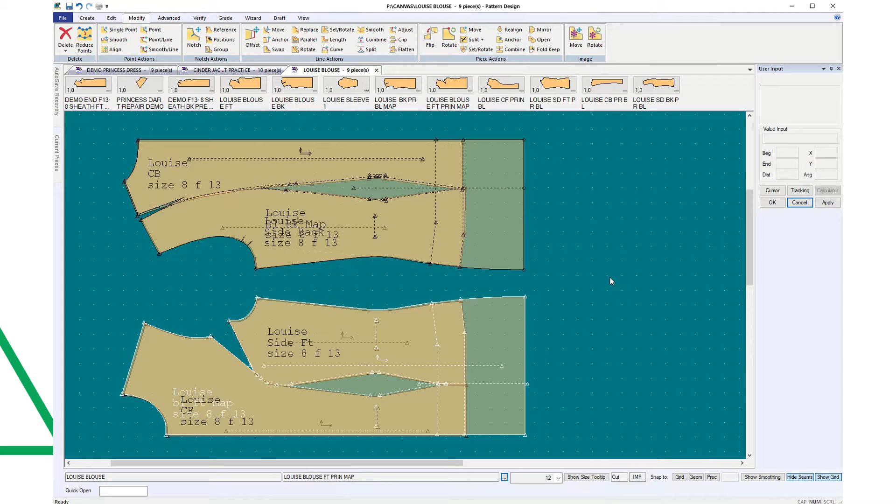Once you've created your pieces and separated your pieces, then it's time to clean them up and smooth them out.

It's always best to look at them the way they're going to be sewn together. So you're not going to put the center front and back on top of each other. You're going to put the center back next to the side back, next to the side seam pair, and then the front and then the center front, or vice versa, however they are on your screen, but the way they sew together, because you want to match those lines.

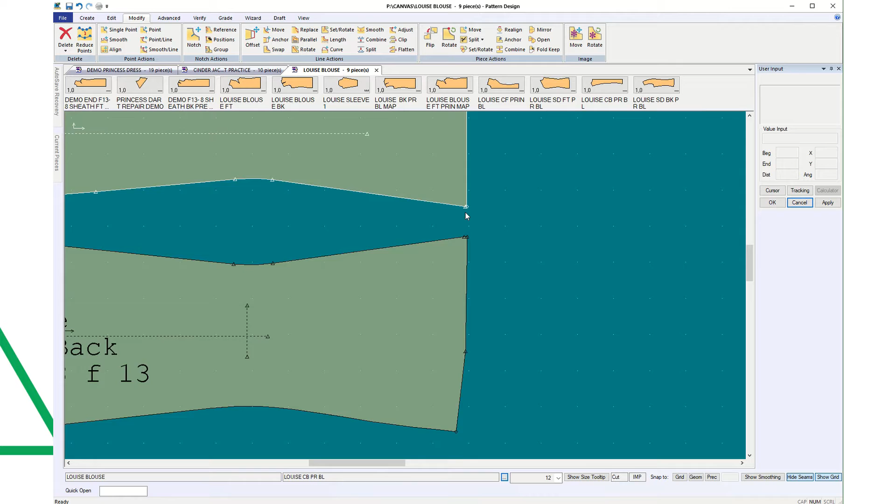You want to combine lines and match notches and make sure that everything measures accurately. So I'm going to start by combining lines. We have a little discrepancy down here where it turns a corner, but I'm going to add extra flare right there. But I need to keep in mind that that extra line split is there. So I'm going to start by modifying my lines and combining them in a clockwise order. This one might not bite you if you don't do it clockwise,

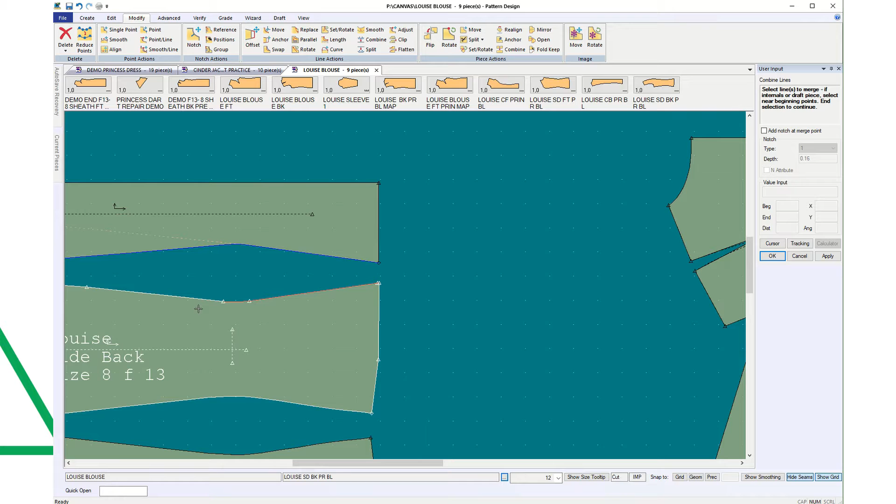But it could. So I've combined that line into one, and I want to get that little itty bitty one. And you could see I kept catching that white one, so I need to touch down in the water and slide around to get the right line. If I had my pieces separated further apart, I wouldn't have that problem. Okay, so that's combined.

And I'm going to combine any line. I don't want to combine my corners, but I want to combine everything else. And it looks like I only have corners now, and that's what I want.

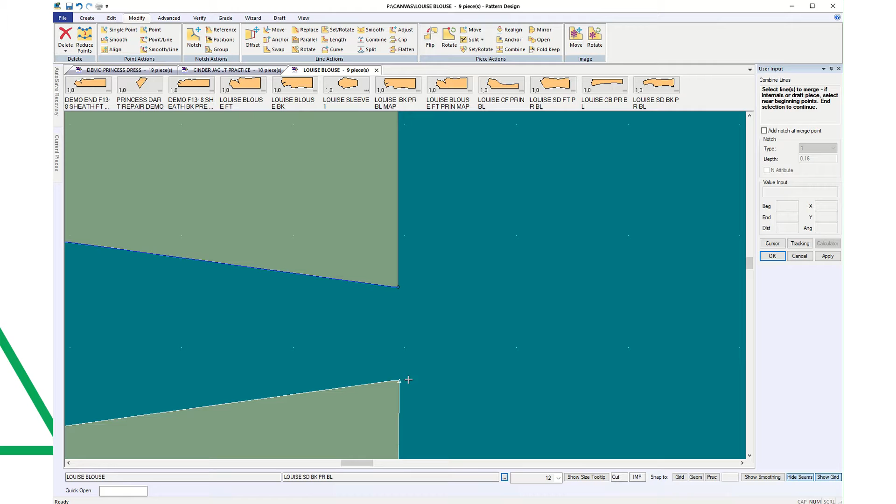I've seen a few of them where people end up with a diamond shape. Oh, here's one. If you've got, what we're looking at right here is the end point of a line. It's an upward triangle, and so this line and this line are separate. But right here, we have that same thing. It's an upward triangle, but I also have a grade point. And when the grade point is attached to the end point of a line, it's the graded end point of a line, and you have an upward triangle and a downward triangle at the same time, and that just means there's a grade rule right there.

If you're not grading yet, don't worry about it. It's okay to have downward triangles while you're working on the pattern. You just need to fix them when you grade. So combine them and then don't worry about it.

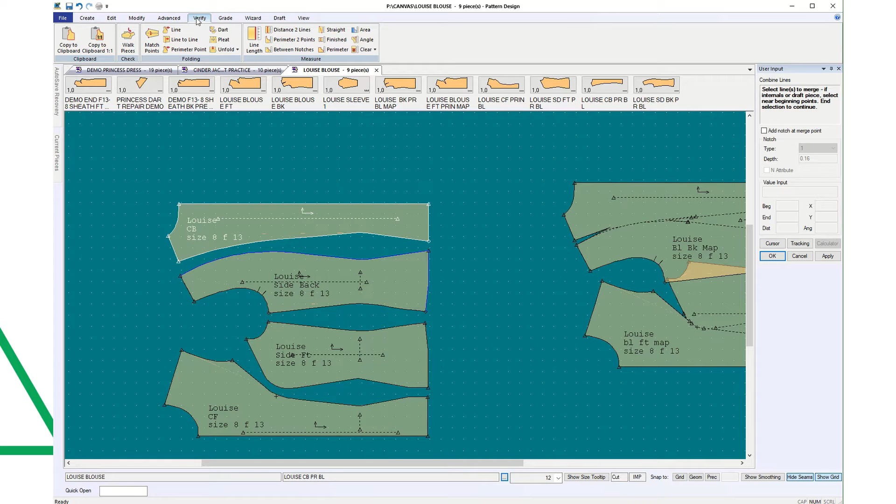Okay, so I'm going to start by comparing my measurements. So I need to go to verify line length. I want to make sure those two are the same, and those two lines. And while I'm at it, I could compare my front and back shoulder totals too.

And when I get to my sleeve, I want to compare my armhole. But right now, we have 18.55 and 18.70. Well, that's less than 1/4 of an inch difference, as long as your center front line is shorter than your side body line and it's within 3/8 of an inch. You should be able to ease that in okay.

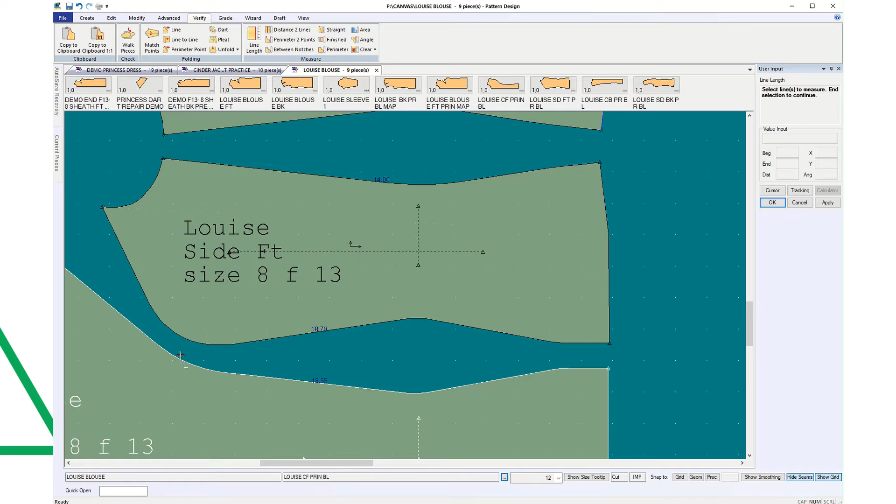So after I've got my line smoothed, I will probably just walk this along and add a notch here, and then walk it up from the bottom and add a notch here, so that I get all of this extra ease over the bust area. If it was more than 3/8 of an inch, I would look at trying to get rid of some of it.

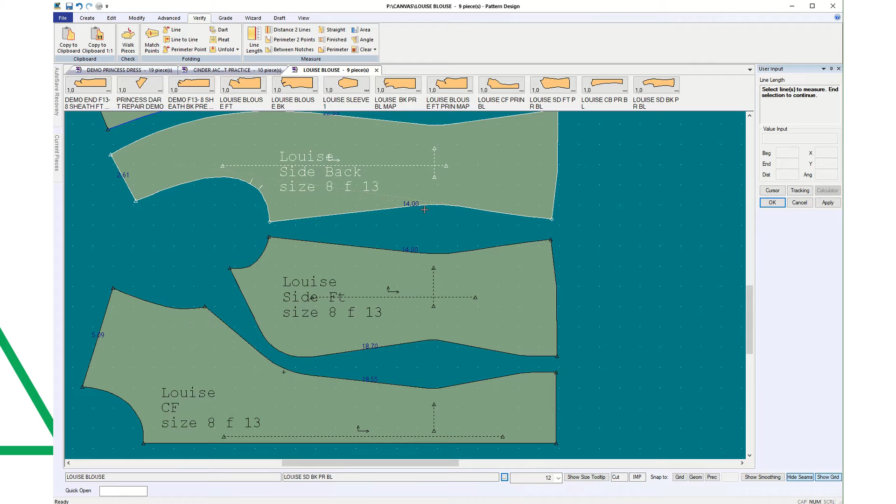But the way we did that, it should be quite accurate. These are an exact match. I'll want to flip them over and compare shape. And this one is 2 points off, which is almost not measurable, but this one is the larger one, so that's good.

So I want to look at, are my lines smooth? Do I have any bumps there? Do I want to make this less fitted? And if I want to make it less fitted,

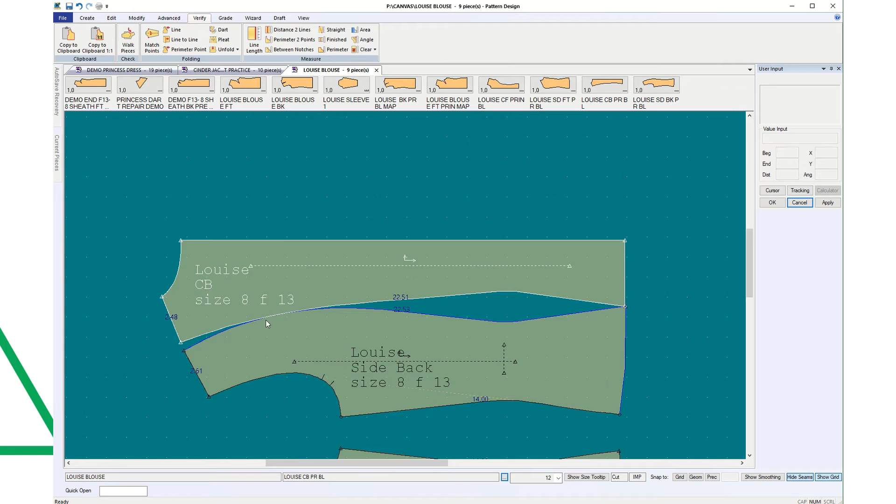I'm going to put those so that they're side by side. And this is a little annoying right here. That's where it shifts direction. Is that my amount off? Because if that is my amount off, maybe I want to pull this line up and shorten it.

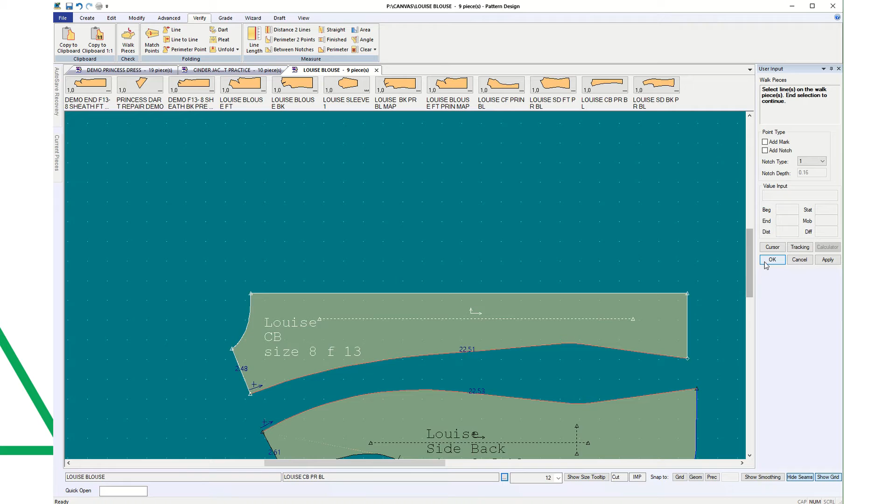So I'm kind of curious about that. I'm going to walk it from the top down. So that's verify walk. Select the line on the stationary piece. I want this one, and I want it going that way. Right click, say OK, and then I want that one, but I want to change direction, so I'm going to right click in the water and say change direction, and then OK. And as I walk this along, it's not quite right there.

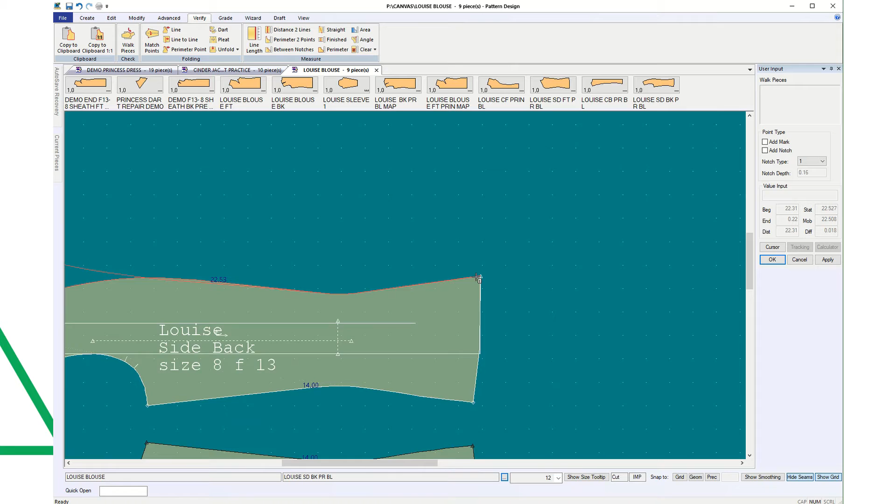But I think I'm going to just change it. Okay, so as I walk this along, I could measure down and put a notch. I could also click right here and stop and add a notch. So if I wanted to add a notch that way, I would come up to create standard notch, put in one of them, and then I want to specifically choose the other one, but the one I've got right now is the side back. So if I want to add a notch visually, I'm going to want to add it.

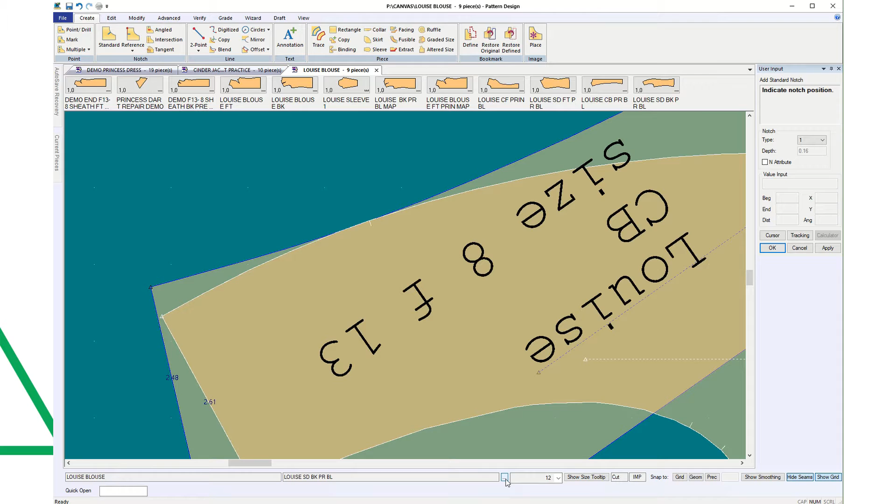I'm going to come down to the bottom and click on the little dots, and come up and choose the center back, and now I automatically have the other piece, and I'm going to highlight that line and come right to where that notch is and add another one. And I'm slightly off. I should have zoomed in more, so I'm going to try that again. And that's so close it's not letting me.

So I'm going to delete that. Modify, delete notch. Oh, looks like I've got a whole bunch of notches there. Something I try to teach you not to do, and there I did it. Okay.

If I had left those 3 notches there on top of each other and this got sent to the Gerber cutter that way, it would have had an error and cut a hole right there. So watch that and keep track of what you're doing. That could cost a company a lot of money.

So it's probably going to be easier for me to add that by measurement, but I'm zoomed in all the way, and I'm going to try it one more time, and I'm going to walk along here, but there's an intermediate point really close, and it's just going to that intermediate point.

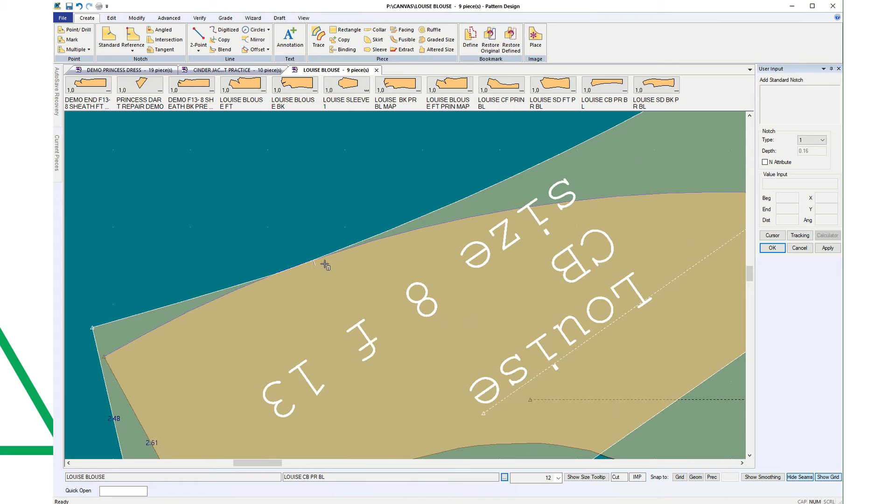So what I'm going to do instead is undo the notch, and I'm going to modify the line and split it. Oh, and see it's stuck on that piece. So last time I came down to the bottom and clicked on the dots. This time I can come up here to current pieces. If you have that set up that way, you can go to current pieces and clear all, so it's not hanging on to that one piece.

So now I can come in and split the line where the notch is, and that tells me that that notch is at 2.98.

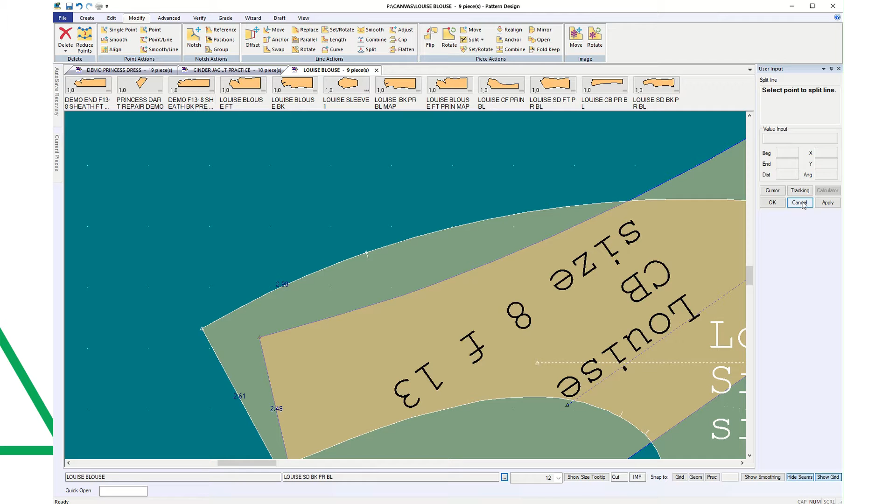So I'm going to cancel, and on this one I'm going to come up to create add notch, switch to value, and indicate my notch position, and I want it on this line, but I'm going to right click and say distance from point, and select the point to measure the distance from. That piece is flipped upside down, so I have a 50% chance of it going the wrong way.

I'm going to guess, I could be wrong, but I'm going to say negative 2.98. Well, it went positive, so I have a notch right here.

So I'm going to do that again. Select, and I ignored that the thing was there. I touched down and slid. And I'm going to put in 2.98 positive this time. And there it is where it belongs.

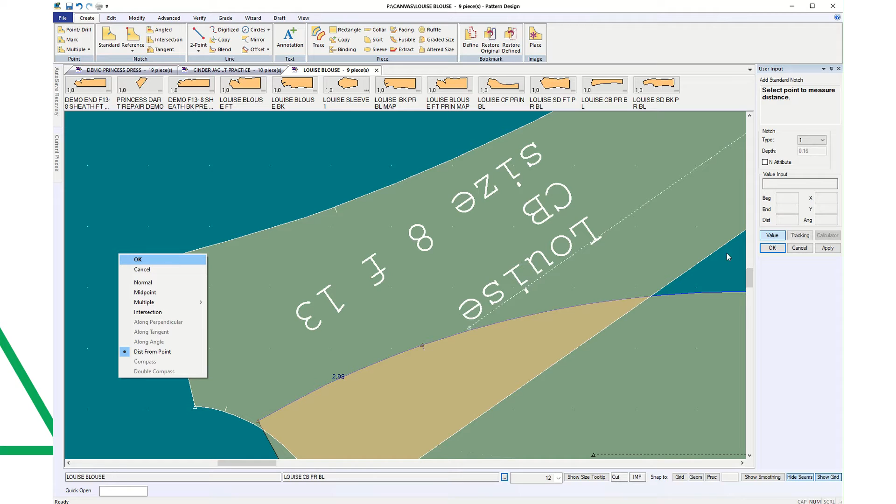Say OK. And then I'm just going to go up and delete the notch that I put in on the wrong place. And if I modify split on this notch, then I have exactly 3. Why do I have 3 if I said 2.98?

Oh, because I split the line in the wrong place. So you have to be really careful. So there's my split point. And if I don't want that intermediate point right there in the same place,

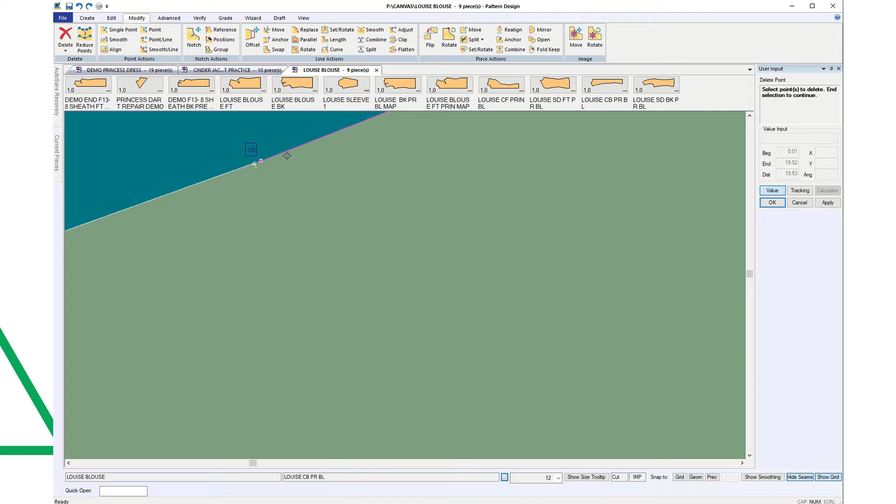I'm going to modify single point. No, I'm going to delete single point, and I'm going to delete that intermediate point, because sometimes having points that close together can be a bad thing, and it didn't affect the shape of the line.

Okay, so we have both notches at 2.98, and that's what we want. So adding them as a measurement, or at least adding the second one as a measurement, can be more accurate.

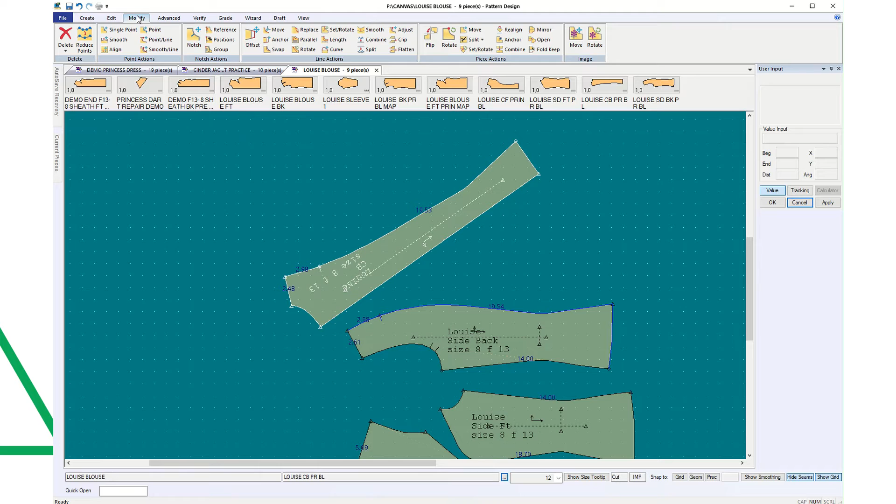Now I've got this piece kind of messed up. Some of you are going to want to put it back the way it belongs. To do that, you're going to go up to Modify, Piece Action, and Realign. You're not going to realign the grain, you're going to realign the piece, and then touch it, and it goes back to the way it was.

And that lines up and matches. So because of the way these two shapes were separated, this one's coming down a little bit longer, so I don't feel bad. Oh, they're only 1 point off, but I'm going to walk them the rest of the way down.

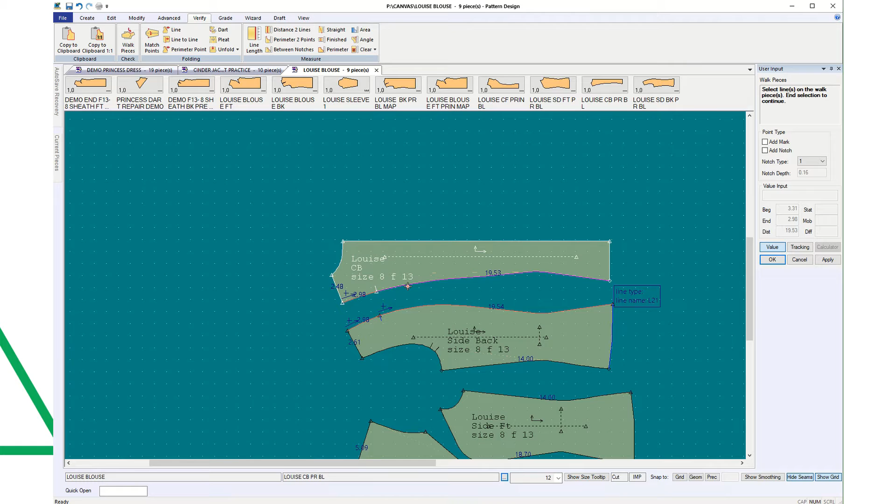So verify, walk pieces - the lines on the stationary piece are both going the right way. The lines on the other piece are going the wrong way, so I have to change direction first, then choose the next one and say OK. I have to switch to cursor so that it moves the way I want it to.

So my notches are lining up exactly, and I'm using the little roller ball on the mouse to zoom. As I get down toward this end, I'm going to move my mouse out here in the water and then zoom in so I get the view I want. So that's looking really nice, and my curves are coming together right there.

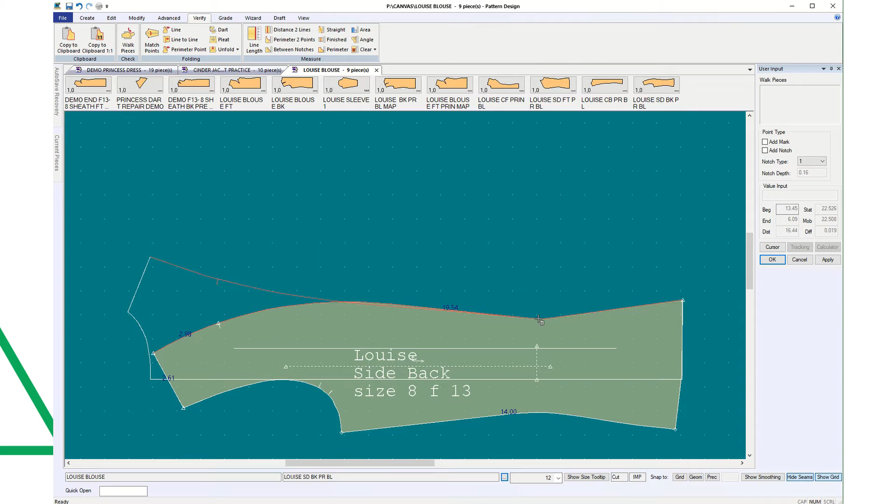I like the way that's coming together, and we moved this line a little bit, so that's going to be all right, but I'm going to set it down right there. And I could have been a little bit more accurate if I had zoomed in.

I'm going to show you some things that might be a bad habit that you have to be careful about doing. But in looking at the way those lines come together, they're really close.

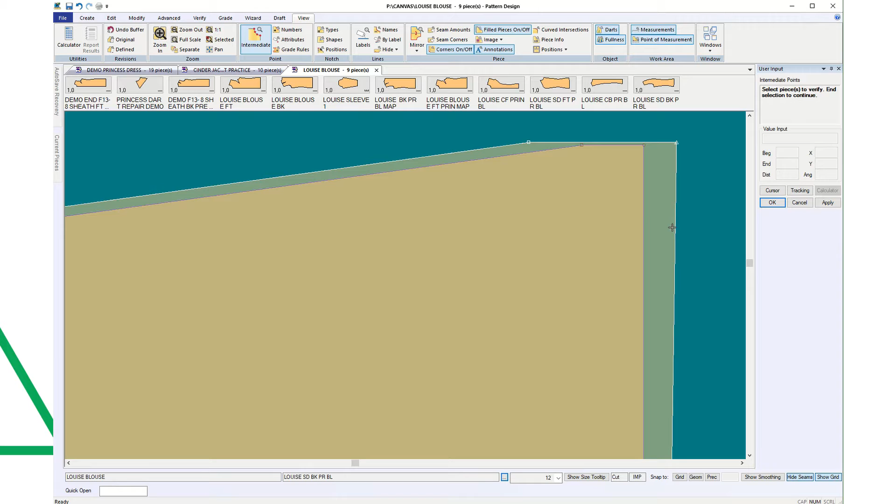And I want to see where my intermediate points are. So view, intermediate points - I'm going to choose both pieces and say OK. And I don't have any intermediate points. You can see where the intermediate points are everywhere else, but I don't have any intermediate points down here that are going to affect my decisions.

So I'm going to take this longer line and modify single point. I'm going to select the point to move - that would be this one - and I'm just going to line it up so it's on top of that one.

Now, maybe they're the same length. I don't know. Let's see. What did I do?

Now, you don't have to do all of these things. You're learning how to do things. I'm being overly nitpicky, perhaps, but they're within 1 point, and that's less than a 32nd of an inch, so I'm happy with that.

And I've got this line that's straight up to here, and I've got this little messy area right here.

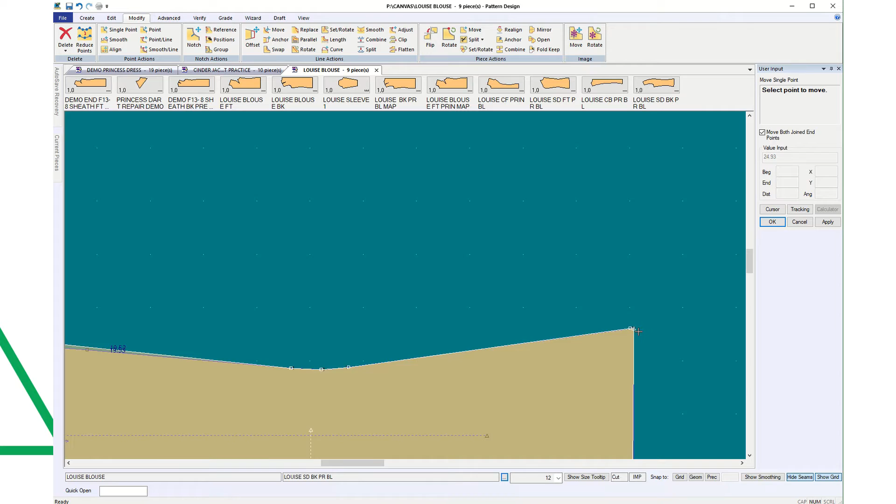So I'm going to split one of the lines where it's straight before it starts to curve. Modify line, split. Right there.

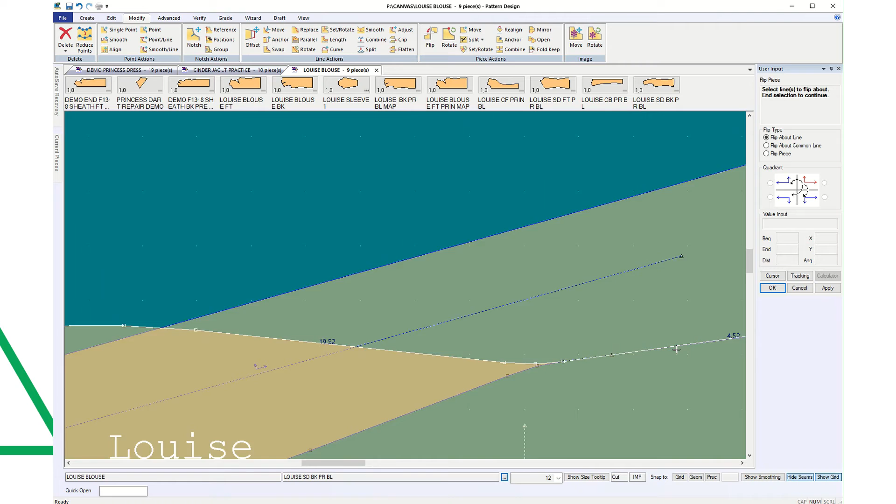And that line that's split, now I can flip around it because it's straight. So modify, flip piece - I'm in piece, flipping the piece about a line, and I'm choosing this one, and I'm going to say OK. So now I have my two pieces side by side right there.

And I would like them on top of each other a little better than that. But I can see that I've got 4.52 right here.

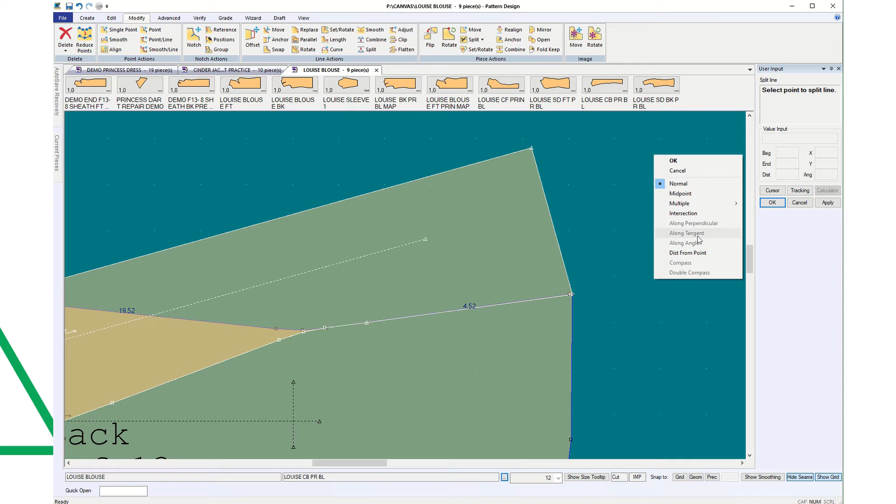So I can do that same thing on the other side. I'm going to modify, split line, right click and say distance from point, and instead of this piece I'm going to choose this one. Well, where am I? Oh, there we go.

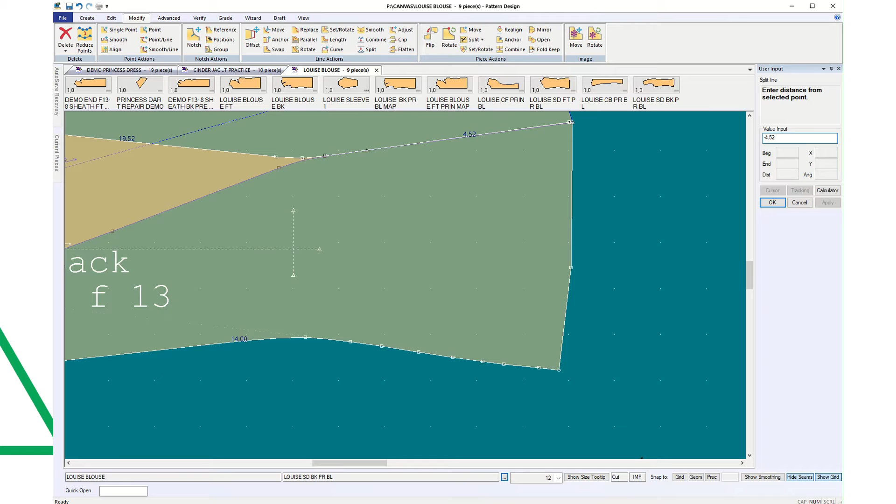So I'm going to come down to the end of that and say negative 4.52 and OK. So they're both split in the same place, and I'm going to separate them for a minute.

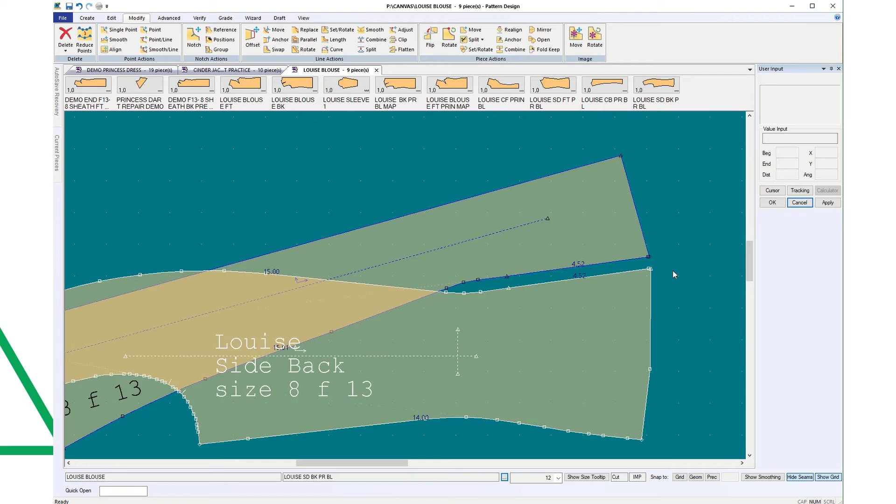This is a little mini version of something you might want to do with a longer piece. Because we're looking at the hem area, I could add flare there, and if I had made my pieces longer, then that little chunk that's missing would be even bigger.

So I'm just going to straighten out that line. I want to keep this point.

And if I zoom in right here, and create a 2-point line from up here where I can see it, to where that line now is disappearing into that point. At the point that it disappears, set it down. And I'm zoomed all the way in.

So I'm going to modify the line and split it right there, and then I'll put it back together. Modify line split, select point split, and when it's split right there, I'm going to swap the line.

For the piece I'm working on, this is not really very important, but you will be working on pieces that have a space like that, and when you've got hip flare, it's best just to let it flare. So I'm going to swap my solid line for - oh, I didn't split it. You can see the whole line lit up.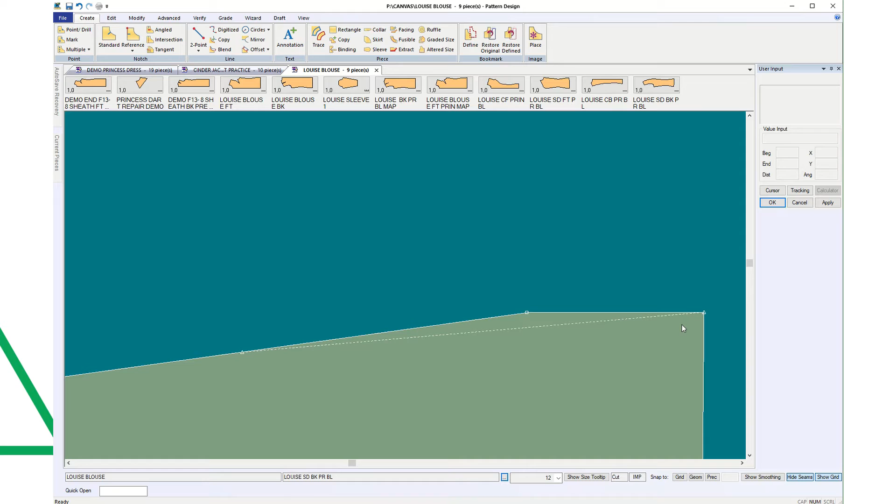Okay, well, it's just jumping to that point because it's such a small space, but we're pretending it's a bigger space. So that's where it went. It's going to keep doing that. If I had more space, I could have extended it out, but I'm going to show you how to solve that problem.

So instead of deleting it and doing it over and making it longer, I'm going to keep it, but I'm going to modify the line and rotate the line, just plain rotate. Select the line to rotate, this one. The point to rotate around is the very end, and then I have it set to select a reference location. I could try bump to line.

If I choose a reference location, I can pull it out to exactly where I want it, where it disappears into the line, and move it. And I am happy with that, and I can swap it, and maybe I want to make it a little bit longer, so I'm going to go up to adjust. And I know a lot of this is boring, but it's problem solving.

If I had wanted to try the other way, that's what I would do, and I would split the line and swap it again. But if we went back to modify line rotate and chose bump to line, I'm choosing this line, say OK, point to rotate around, point to guide the movement, select line to bump to. Well, that didn't help at all. So I'm going to go back to the other one. There are some times that will help you, but not this time.

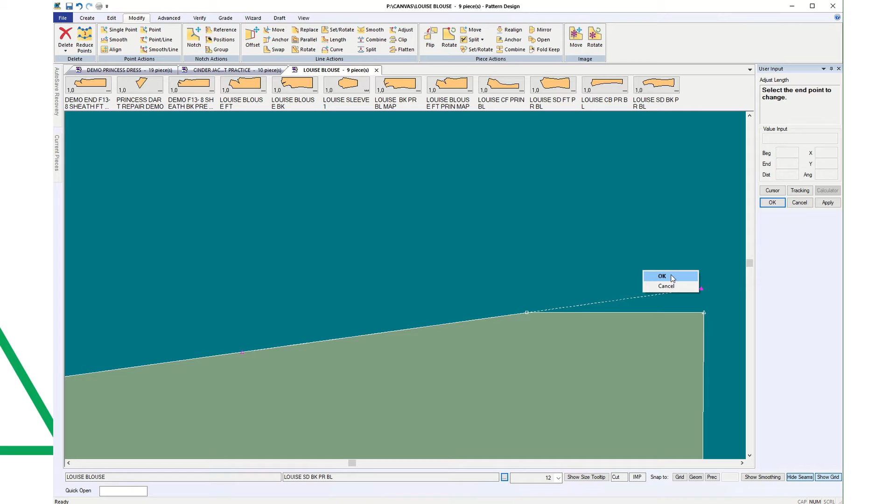So I'm going to go back and rotate the line. Modify line, rotate. Choose the end, deselect bump, and rotate. When it disappears, then it's in the right place. And I'm going to adjust the length again and pull it out.

Modify split, right, no, I don't want to split that line. I want to split on this line at the same place. I don't want to make the same mistake I did last time. And then I'm still in modify, so I'm going to switch to swap and choose the dotted line and then solid line and then delete the line. And then combine the line. Okay.

So they're still both at 4.52, and now I can put them back together where they're split. So I'm going to do modify piece set rotate, select the match point on the target piece, that end of the line, that end of the line, that line, and now they're stuck together, and I'm going to say cancel so that they end up right where they are. Well, now I've got this.

And they were the same length, but because I split the pieces in the exact same place before I changed the length, I can leave it here and blend this. So to blend this edge, it's not a 90-degree angle right now. The more important factor is the smooth curve. So I'm going to create a 2-point curve that starts here and comes down to here, and then I'm just going to blend across.

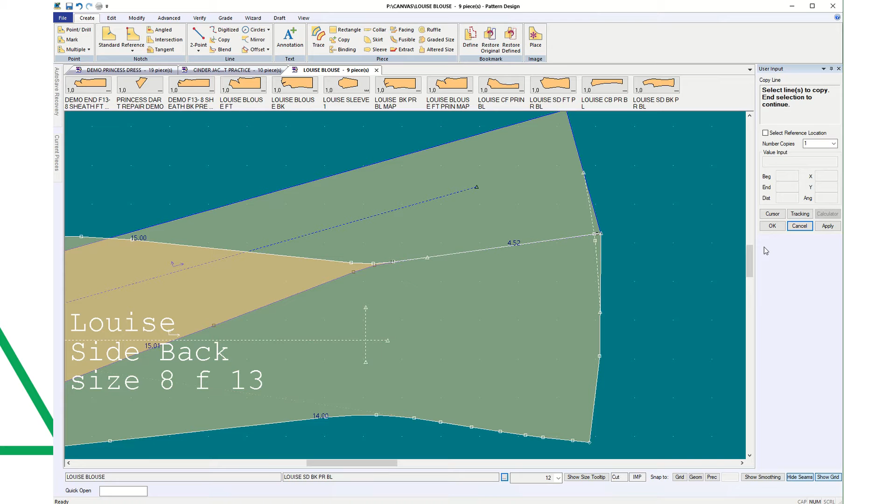So I'm going to create line copy now and select the line to copy, this one, say OK. I want it to go on this piece, so I'm going to say OK to that. There's my line. I'm going to come back and say cancel, so now I have one on both pieces. And I'm going to say OK to get out of that. And I'm going to move them apart.

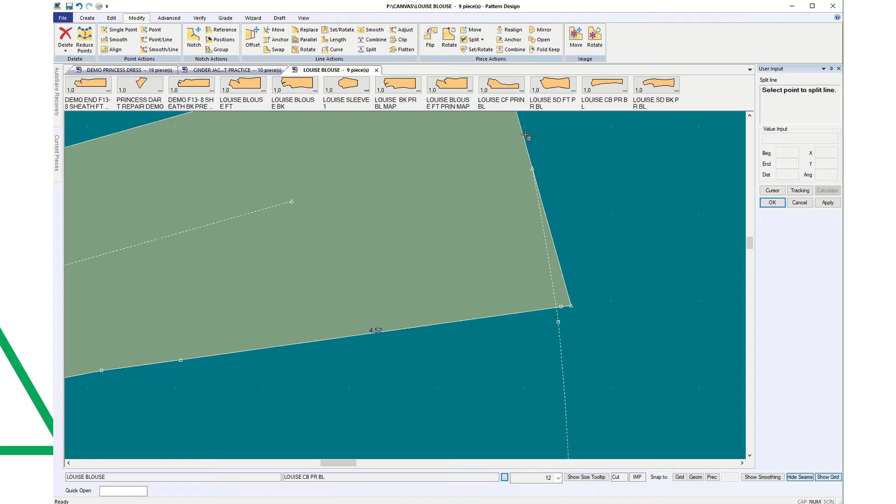And I want to swap this for this, so I need to split right here. If you forget to split, you get a mess. Modify line, split right there in the same place. And I'm going to do them both at the same time. So while I'm in split...

Now I'm going to go back up to swap. I want this line instead of this one, and I want this line instead of this one. And now I'm going to delete those. Delete line.

Some of you, I find at this point, can't tell which line you need because your lines are not dotted. If you're finding that the lines on your screen are not dotted, like my lines, you can't tell internal lines from solid lines, lines that are permanent from lines that are temporary. If you don't have dotted lines, come up to Edit, Customize...

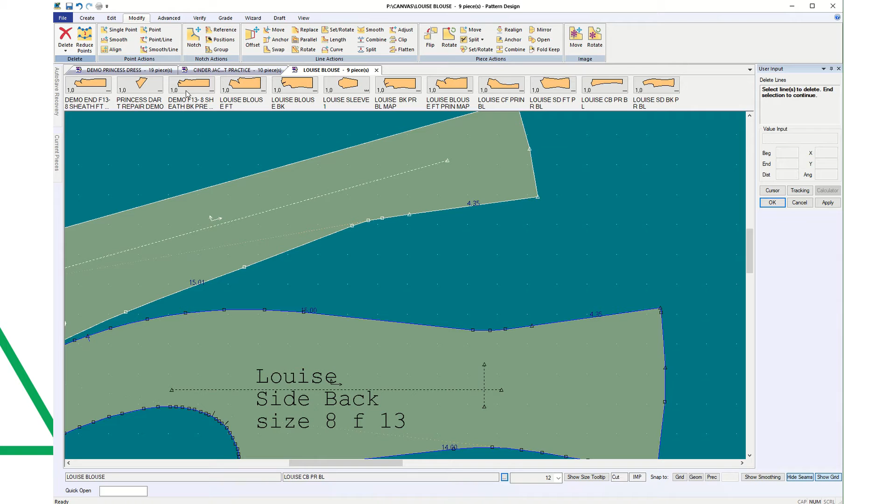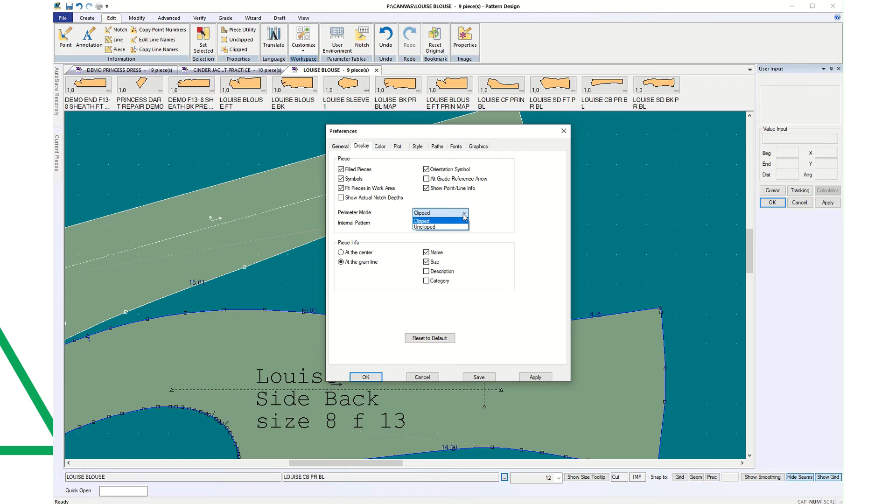Screen Layout. Nope, sorry about that. Customize, Display, and make sure you say clipped and dashed. You don't want solid lines here, you always want dashed. Apply, save, and OK.

If you do apply and save, it's more likely to be this way when you come back next time. Okay, so those match now. And if I want to, at this point I can walk it up from the other direction, and I have 15.01 and 15, so I'm happy with that.

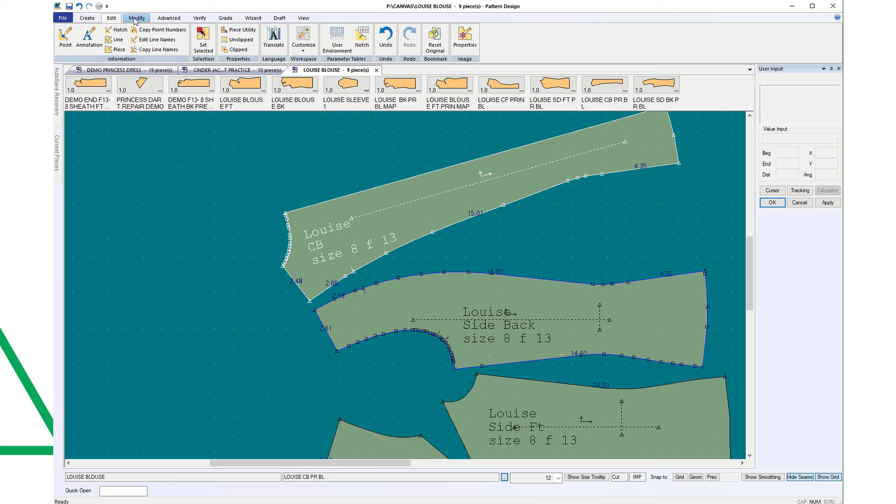I'm going to combine these two lines back, modify line, combine. I want to combine those two, and these two, those two.

So your lines should only be split at the corners now. And now when I walk pieces, verify walk pieces, I'm going to start from the bottom and put in a notch. This is my stationary piece. I want it to go the other way though - change direction. And it looks like I need to combine those lines, but I'll do that next.

Oh, stationary piece, I didn't say okay. And then the walk piece. And it's going the way I want it to, so okay.

So at this point, I could come in and put a notch here somewhere. You could put a notch anywhere between here, and that's up to you. Probably what I would do is decide where I want it and just split it, because it'll be faster.

In fact, I'm just going to put it where that point was. So I'm going to create a notch where I already had a point where the line was split. And if I split the point there just to see - modify line, split - see, that's what I should have done before. So 4.35. And if I split this one back again, that's still 4.35. So I'm going to add a notch there. And I could have thought of that a few minutes ago and saved that much time.

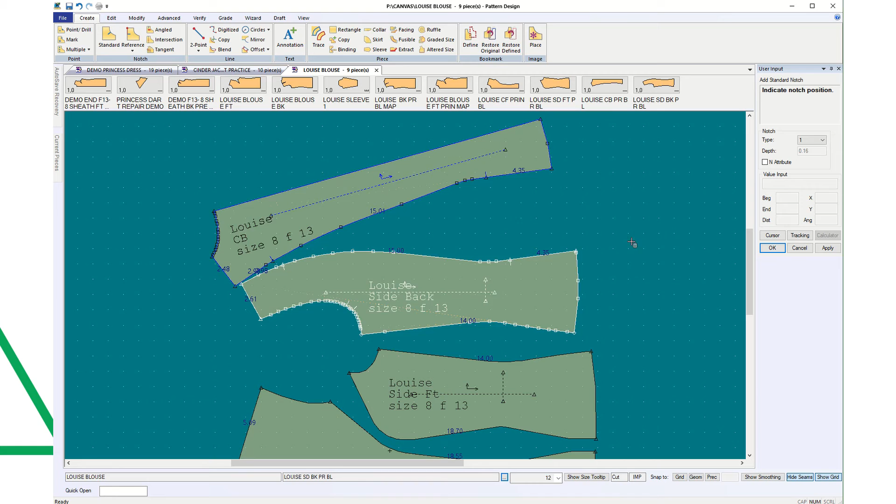Modify, combine. 1, 2, 3 lines. Okay. Modify, combine. 1, 2, 3. And I'm going clockwise in order.

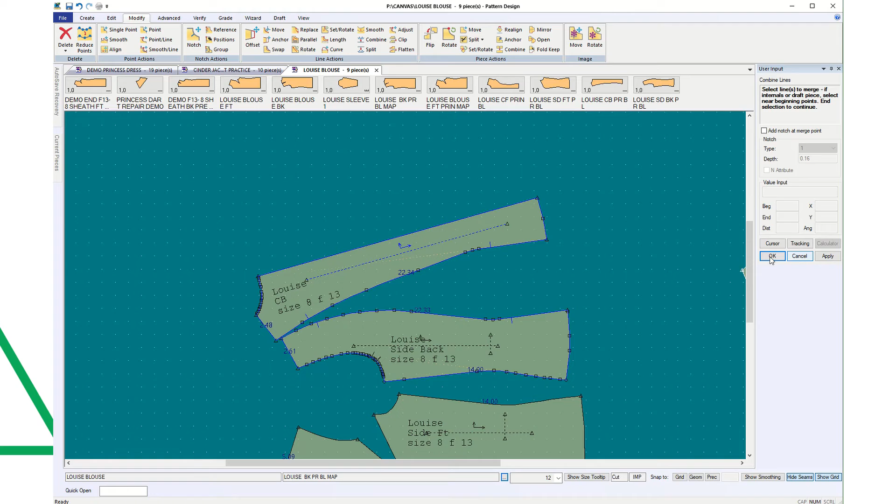Okay, so some of those lines you could smooth out more. I want this to go back, so I'm realigning the piece. So I've got those two matching. And I've fixed the hem so it's nice and smooth.

These two look like they might need to be lined up. And these two, you'll go through the same process, but you'll be adding more flare right there than we did on the back. Okay.

If I do set rotate on the back piece with the side piece - well, I didn't say cancel, so that's messy.

And I've got them together. I can see this is a nice curve shape, which I would need to check. And I want to flip around this line, but if I flip around the line now, well, I'll show you because you'll remember - if I flip around this line, it goes crooked.

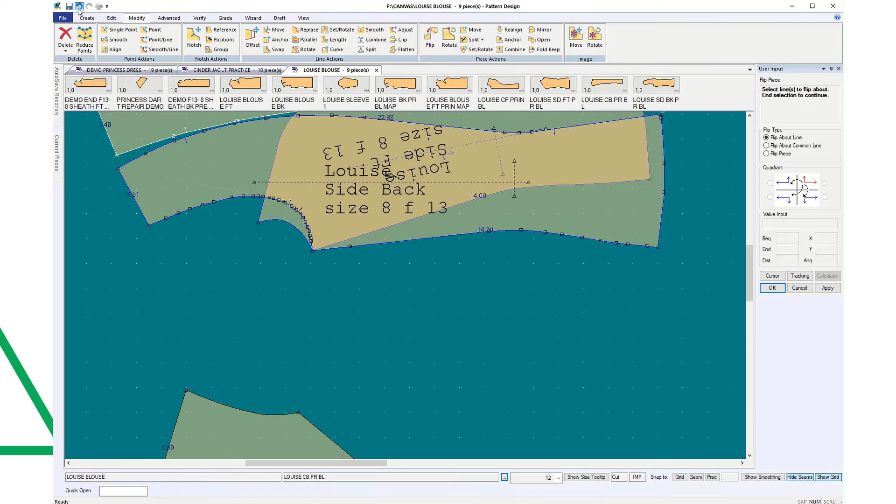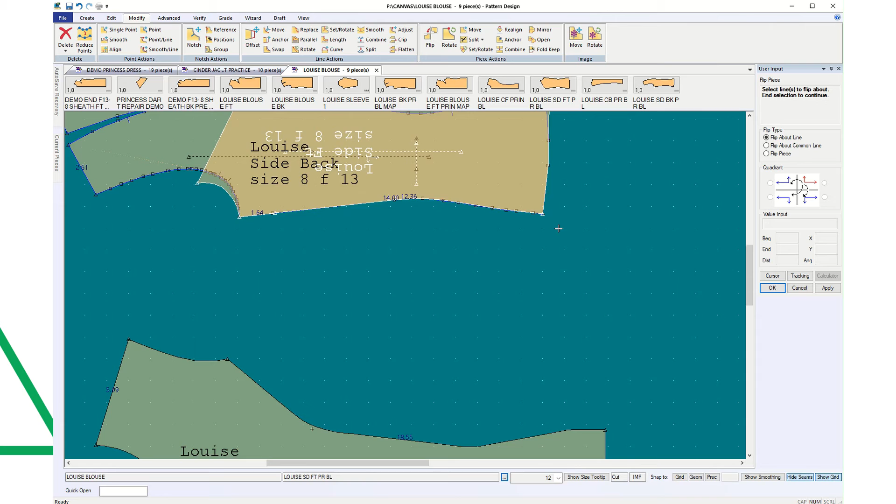So if I undo that and I modify the line and split it where the line is straight, and I flip around just that straight line, then I can tell that these pieces align exactly. And they might be a 1/16 of an inch off, and we could rotate them around and make sure they're okay, but I'm going to leave that one be. So I'm going to undo both of those and put this back over here. So I have this matches this and this matches this.

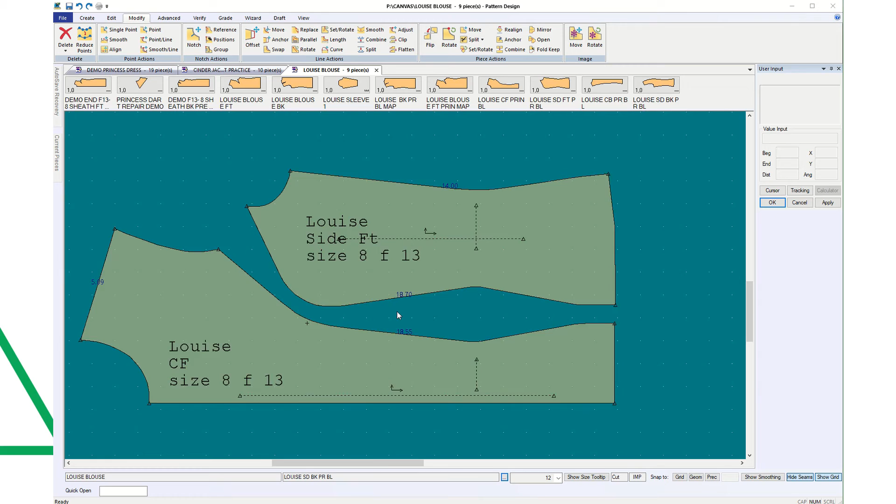And now we want to make sure these two pieces match. Well, this one - typically they're not going to end up the same because of the size of those two darts. As long as your center front line is the shorter line, because you don't want puckering on your center front line. It's okay if you have a little bit of ease getting your side front into your center front, but not the reverse. So because this line is the shorter of the two, it's okay.

So 70 minus 55 is 15. So that's less than 1/4 of an inch. So that's going to be an okay amount to have there for ease. I am looking at these two lines, and if I want to make the curve slightly different, you don't want any bumps.

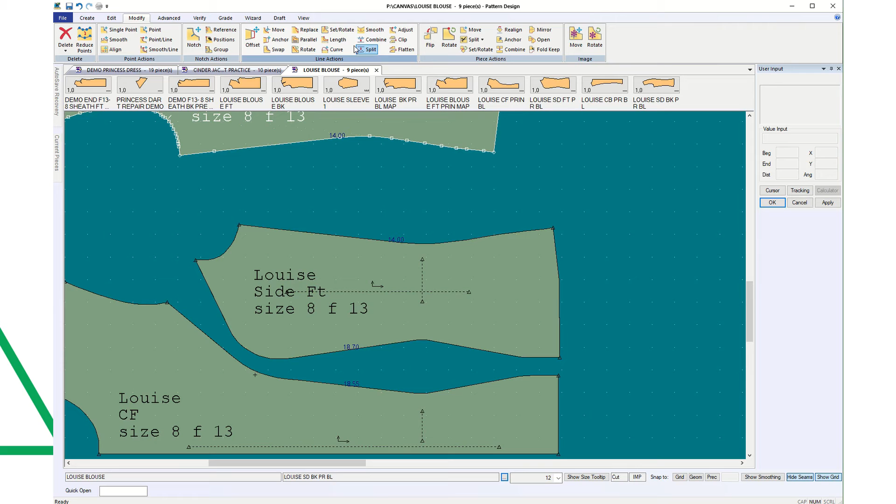Right here, there's a point that might be out of place, so I'm going to put my intermediate points on there. The view, intermediate, touch, touch. Okay. So I have where the curves are, you can see my intermediate points. It feels like it's that one. And in TUKAcad, I would probably go in and pick that point up and move it.

In Gerber, I can blend that point, but I'm zoomed all the way into it now. And maybe I'll try moving that one single point a little bit. Or I could delete it. What would happen if I deleted it? Modify, delete point. Well, that's worse. So I'm not going to do that.

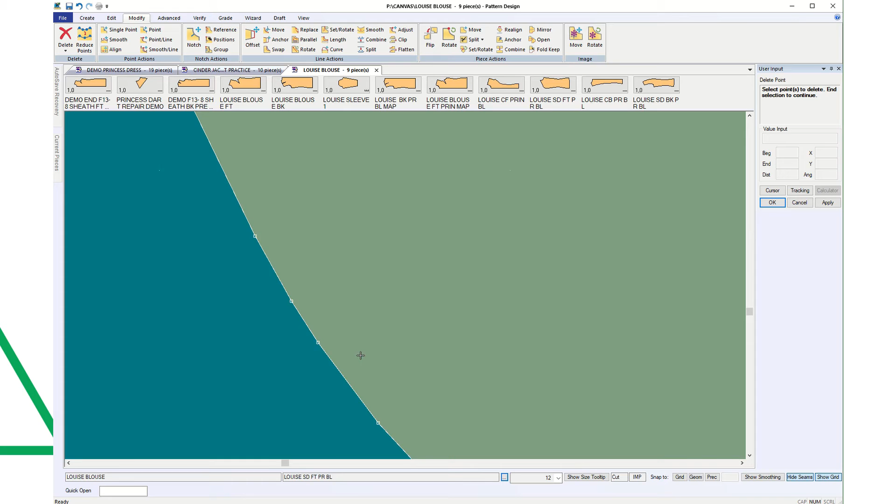But I can create a point. And I want to put a point here and a point here because I want to hold the line right there. And now if I come in and modify delete point and I delete that one, I just smoothed out that curve without extra drama. So you can go back and watch that again. But I added a point on each end where I liked the curve, and then I deleted the pointy one.

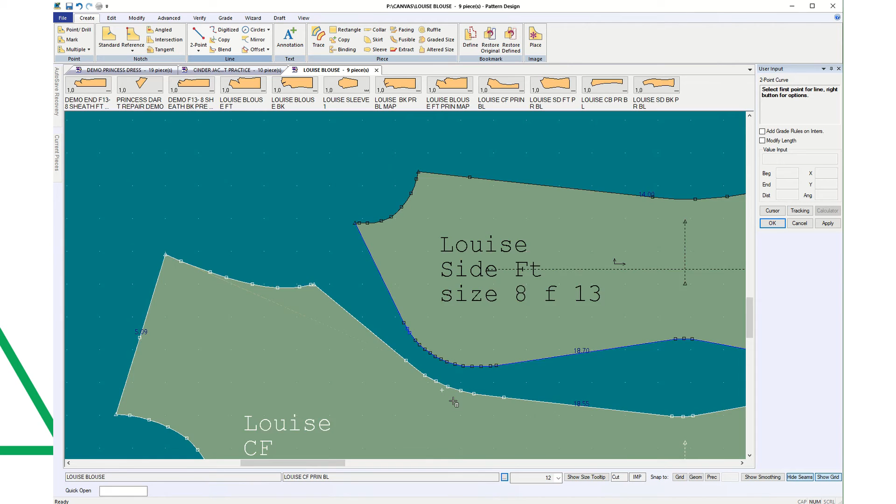And you've seen multiple times. If I want to change it, create 2-point curve, I could come into maybe this area, and if I wanted to flatten that curve out, I could do that too. And I am moving it a little bit to the side of the bust point. I'm curious, how far is that from the bust point? So I added a line just so I could measure the distance. Verify line length.

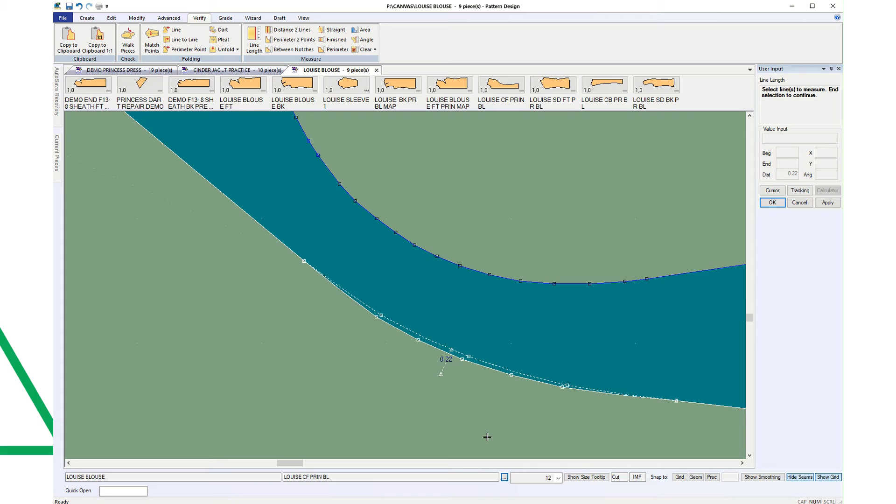That's less than 1/4 of an inch from the bust point. You can have that wrap around to the side at least 1/2 an inch before anybody notices. And depending on cup size, you could even go as much as 1 inch. So that's okay. You don't have to change that curve. I'm just showing you because if you want to, you can, but you don't need to do that. This is how to.

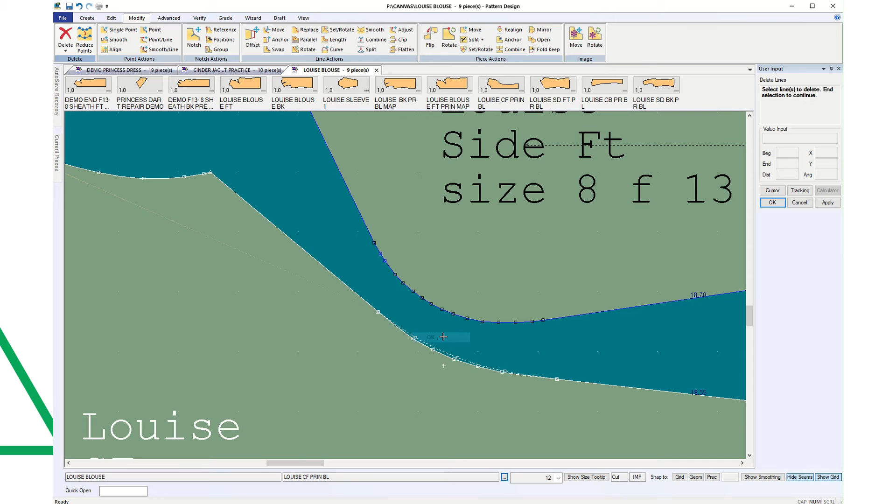So I'm going to delete that line, and I'm going to modify split. Come over, touch down, slide, highlight, release. Same thing again, and split, modify line, swap, dotted line for solid line, and I'm going to delete that line. And now I'm going to combine it again and see what my measurement is, because I probably changed it a little bit. Modify combine.

So I reduced it by a point. It's still less than 1/4 of an inch, so I'm happy with it. So I'm going to walk these pieces now. In fact, I'm going to split this line right here because I want all of this ease between here and here. Modify line split right here. 3.06. So I'm going to create a notch and I'm going to add it at 3.06.

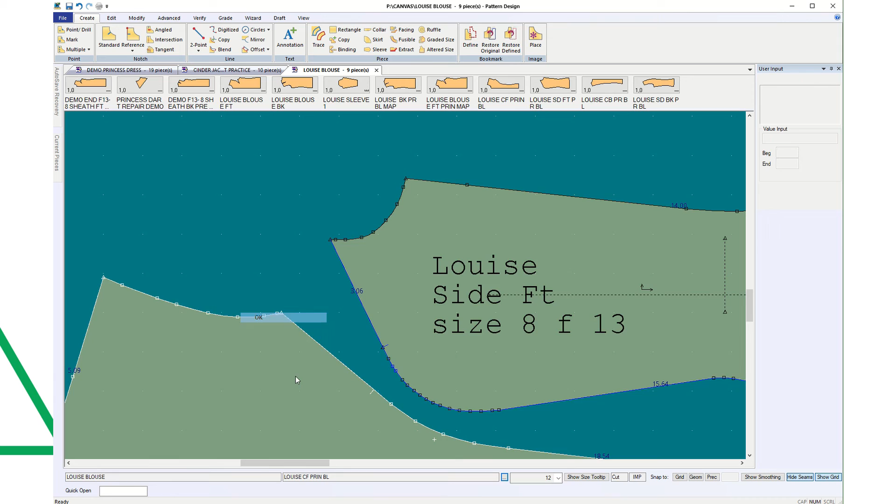And then I'm going to add another notch, but this time I'm going to switch to value and right click, distance from point, ignore that and come back. Oops, touch that point and put in 3.06 and say OK. So I'm going to combine that line back. Okay. So now

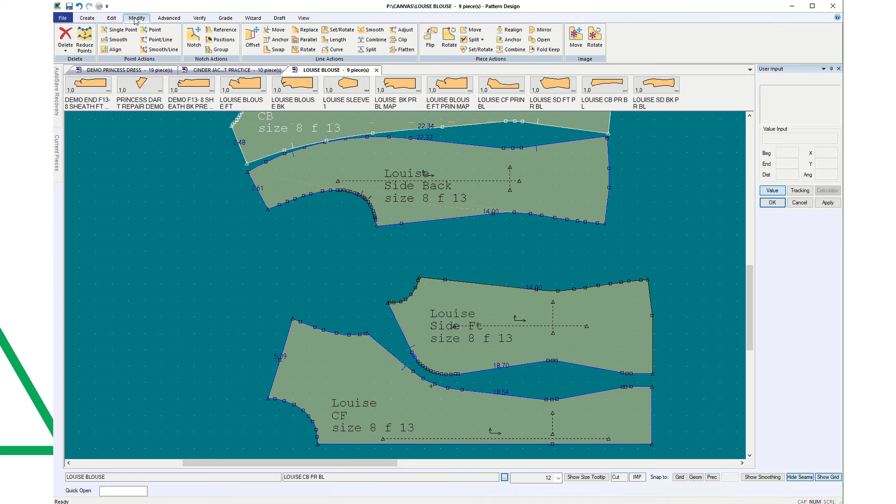Verify walk pieces, select the lines on the stationary piece. It's going from top to bottom. OK. Bottom to top, so change direction and then say OK. And now our notches are lining up, but it's not moving because I'm still in value, so I'm switching to cursor and now it's moving nicely. Well, I don't like that. And what if my difference here is because my length at the bottom has changed?

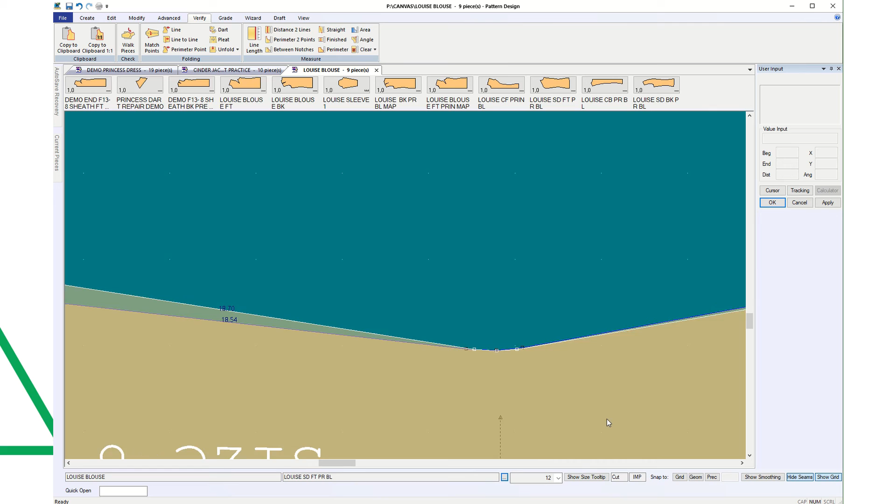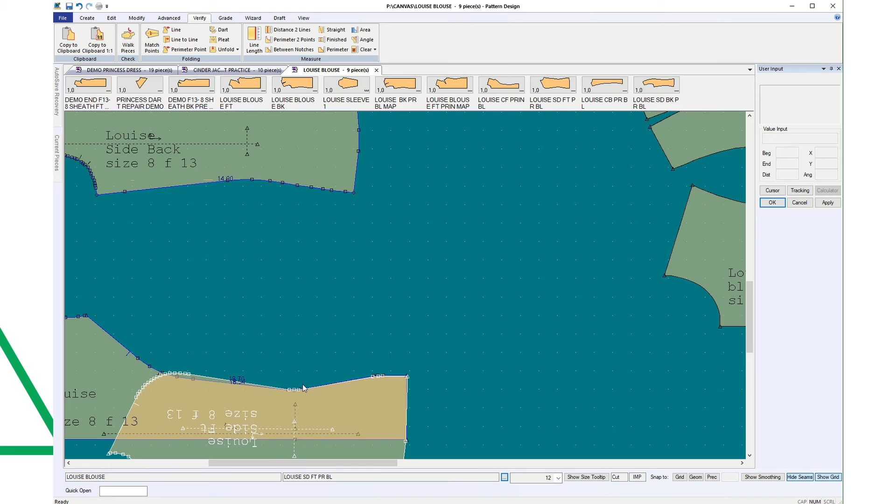What if I manually rotate that piece and look at it? Now I'm getting really nitpicky right now. This isn't something you would have to do. You could just measure up and put a notch right here and call it done. Modify, piece, rotate. Select the piece to rotate. Do I want it to go clockwise or counterclockwise? If I choose this one, no, I want to rotate the other one. So I want to be counterclockwise and I want to choose my side front.

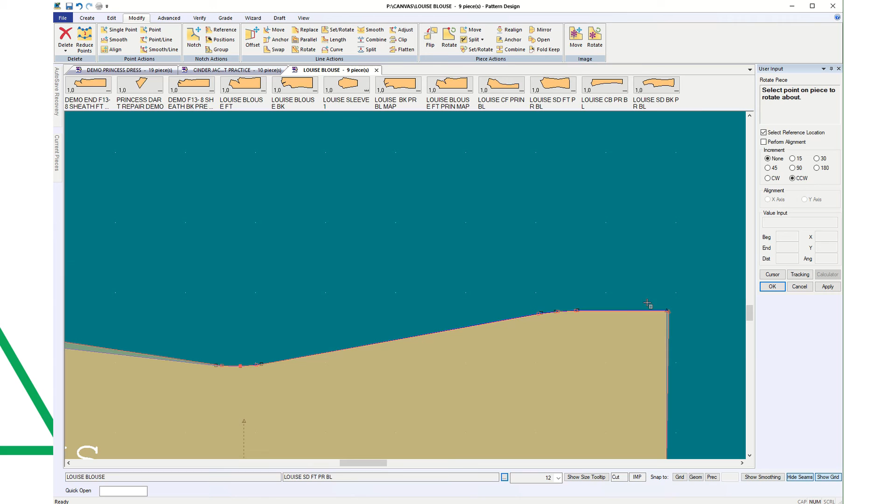Say OK. The point that I'm rotating around is this one. So I'm going to choose a reference point and pull it out here. And that's actually about the same shape right there. Before I split that piece, I might have been able to give myself a match point. So I'm going to do that one more time and zoom in a little tighter. And push that up to there. Well, we have an almost exact match right there. It's a little off.

But what if I move that point up? What's my line length right now? I'm trying to think the same way I think when I'm working with paper. So I found a place to line it up, and I'm going to shorten that a little bit. So can I move that line? I think I can.

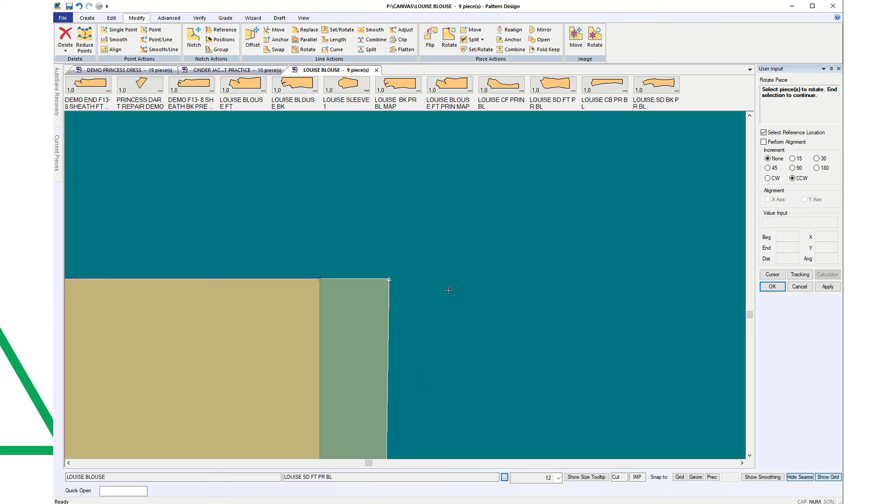So I'm going to take the longer one and I'm going to modify single point, and I'm going to move that one point and I'm going to drop it right there. Could have done a better job with that. When it disappears, it's in the right place. Okay, so I just made them closer in length than they were, and I'm happier with that.

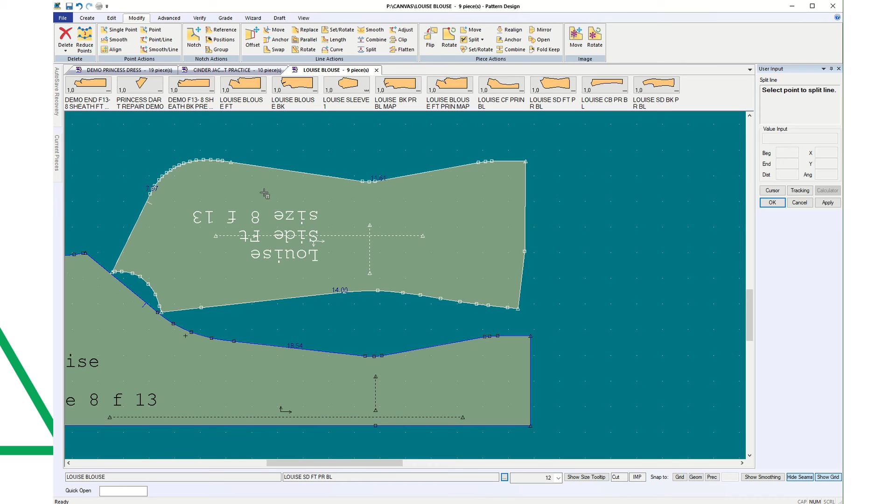So I'm going to walk my pieces again, going up, and I'm going to add another notch right here in this area. And that will put all of my extra space right there. So I think I want to split it right here. Modify line split. Notch on the split line. And that's 11.61. So I want to split this line at 11.61.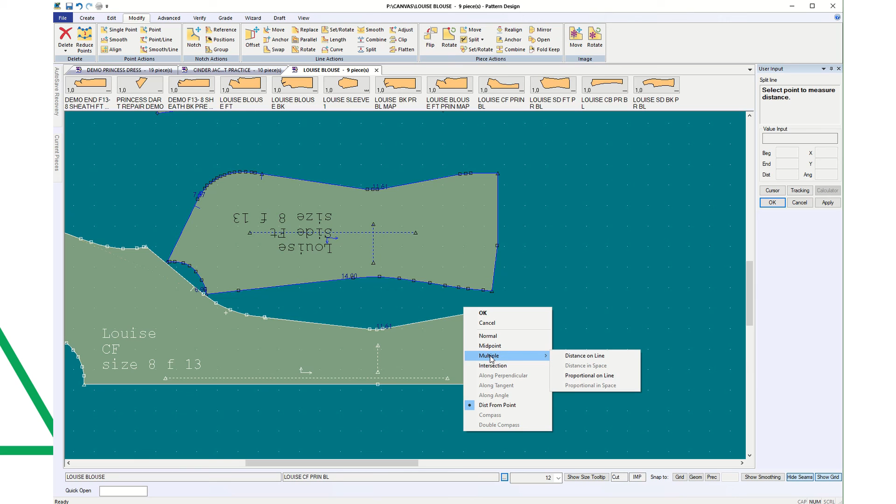Modify line split. Right click in the white and say distance from point. Measure from the bottom up. 11.61. Negative, nope, not negative. Yes, negative. Negative 11.61. Did I say split? No, I said measure. What did I do? Okay, so I just split it. Now I need to add the notch.

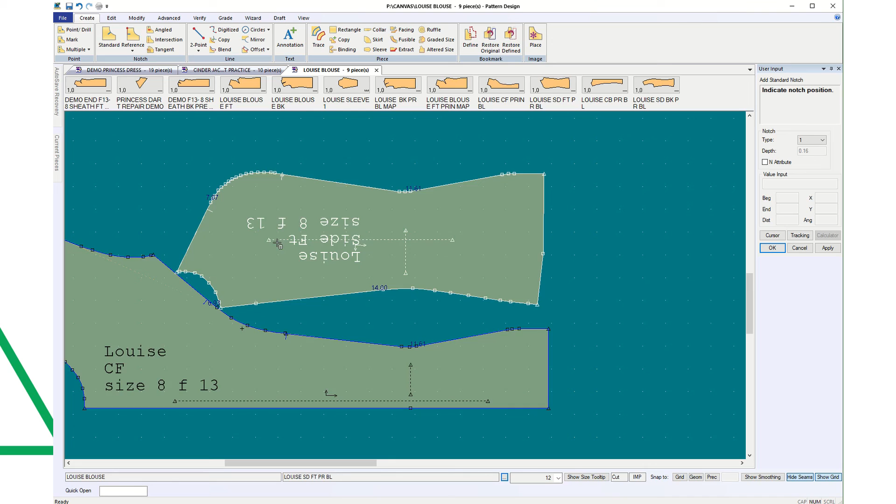Uh-oh. Create notch, not modify notch. Okay, so I have this one and this one at 11.61. And this space is 6.93 and this space is 7.07. So we have 1/10 of an inch. And I probably would put another notch down here between these two as well, but this video is getting kind of long.

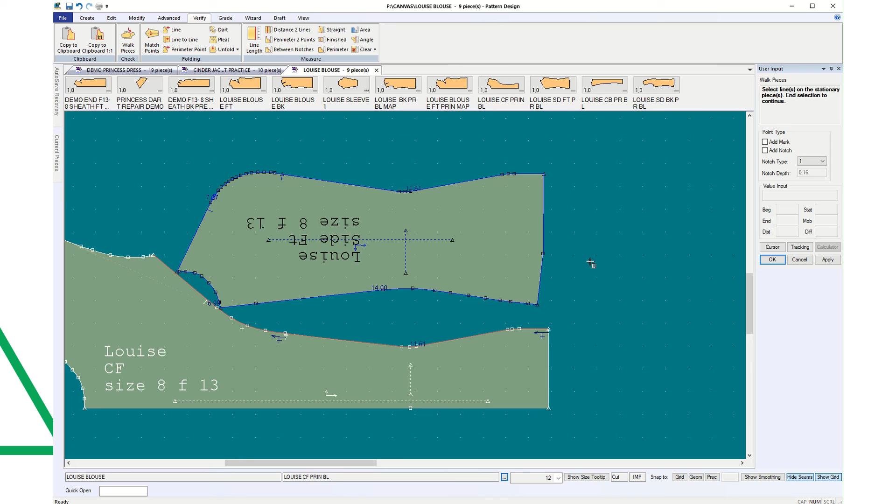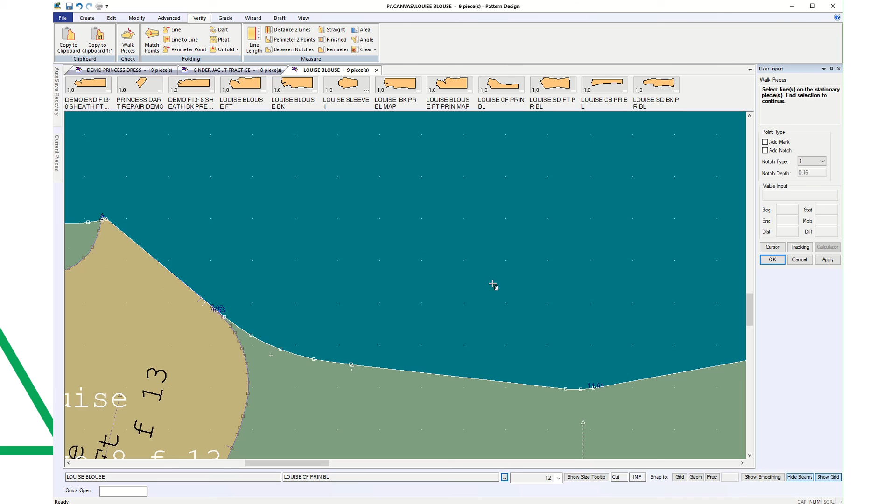Verify walk pieces. Change direction and then do the rest of them. Say OK. Change direction. Say OK. So now I have, these are matching. You knew they would. And you can see where the extra is going, and you just add that much ease right there in that little space, and that's going to look nice.

So I'm going to take this piece and come back over to modify, realign the piece and put it back to the way it was. And while I'm here, you're going to extend this out and extend that out just the same way you did with the other pieces.

So before I do anything, I'm going to come up and split this at 5 inches on both sides, maybe 4. What? 1, 2, 3, 4. I'm going to split it at 4. Modify line split. Distance from point. I'm going to measure from this point 4 inches. So it's split right there.

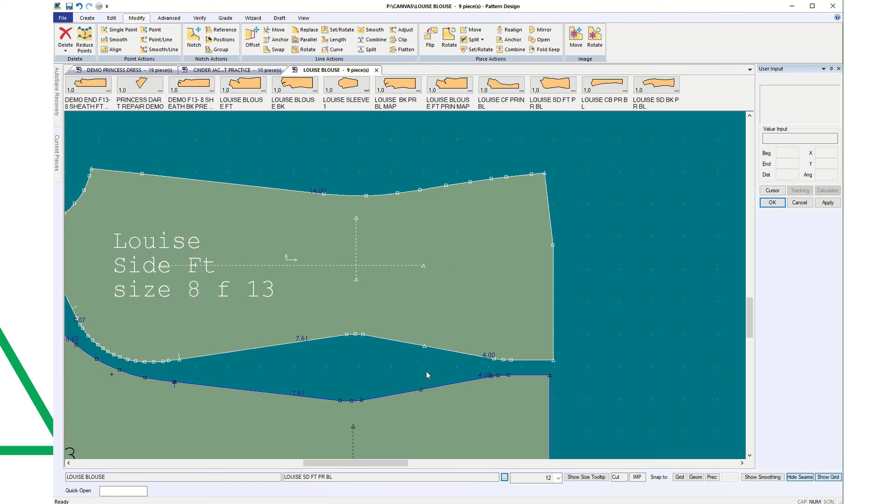And I'm going to measure from this point -4 and say OK. So now you can line both of those up, extend this line out on both sides like we went over in zoomed in on the back, and split and swap. But before I go any further, I'm going to come up and save all of my pieces and say OK.

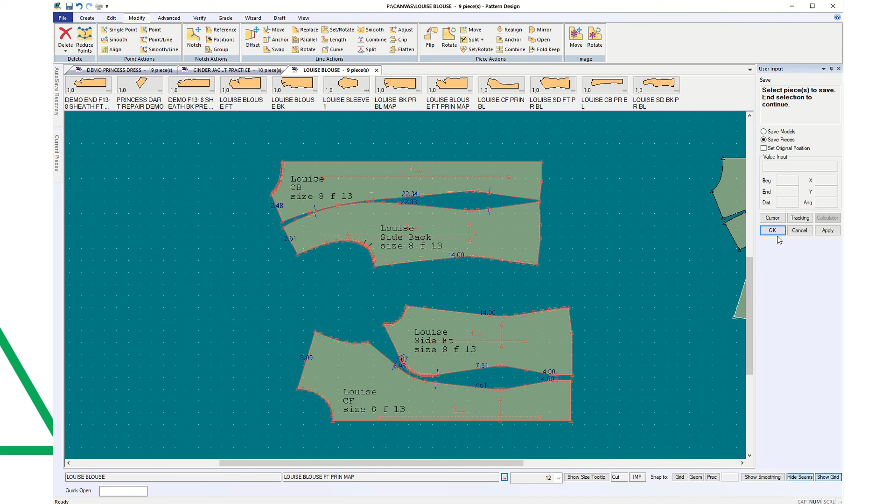And then go back to the beginning of the video where we extended the line on both sides and swap. And then you're going to end up modify, set, rotate. You'll end up putting these two lines on top of each other. And create a 2-point curve between the two. And blend that nicely.

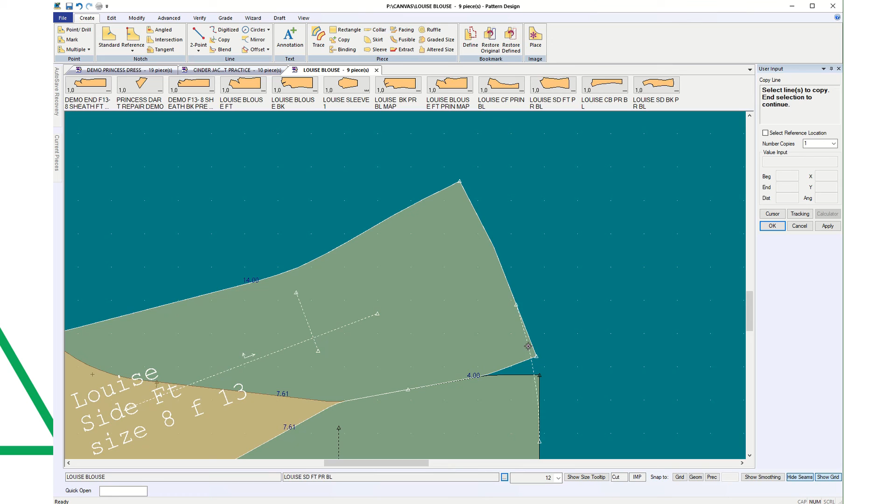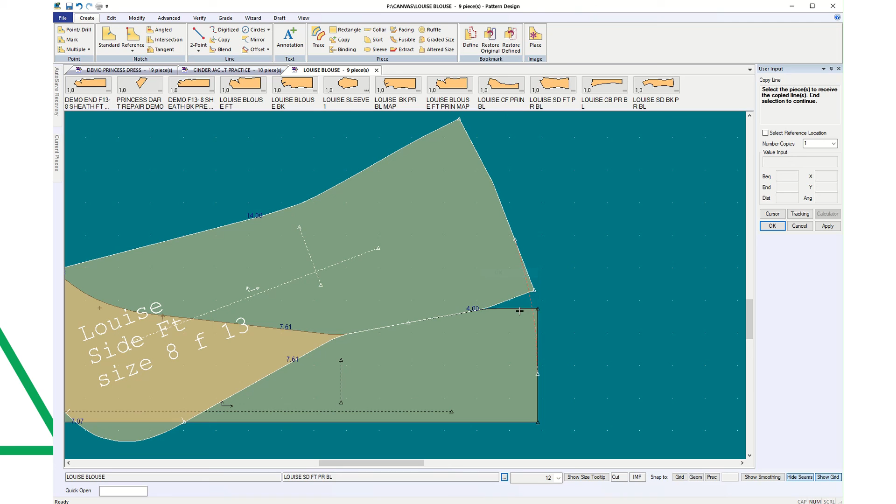And you'll want to copy this line to the other piece, so create line, copy this line to this piece and say OK. And you just ignore those squares when they happen. Except I don't think I got my line copied. Create line, copy. Select the line to copy. Say OK. Put it on that piece. Say OK. There's the line, and then cancel. OK, so it's on both.

And you can move them apart and swap the line and extend the line and do it one at a time. So if I create this 2-point line and it disappears into that line, and I create this 2-point and it disappears. When you swap these lines, you need to split here and split here and split here and split there. Don't try to swap this line and this line for this line and that one.

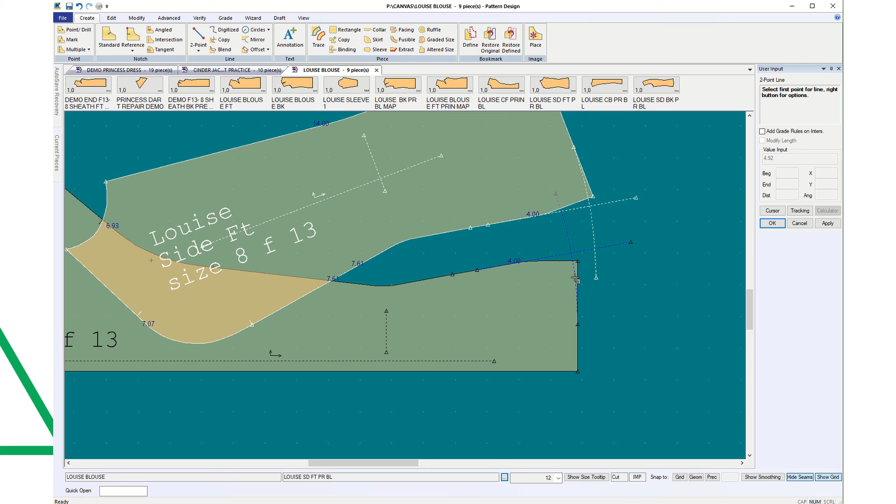Swap this line for this line, and then as a separate activity, swap this line for this line. So you'll be doing 4 separate swappings, even though you can do your splitting all at once. The computer has too much to think about to do this line and this line for this line and this line. Do it one at a time. And then save your pieces. And then the next thing we would be combining and comparing would be to align the shoulders and make sure you have that nicely matching as well.